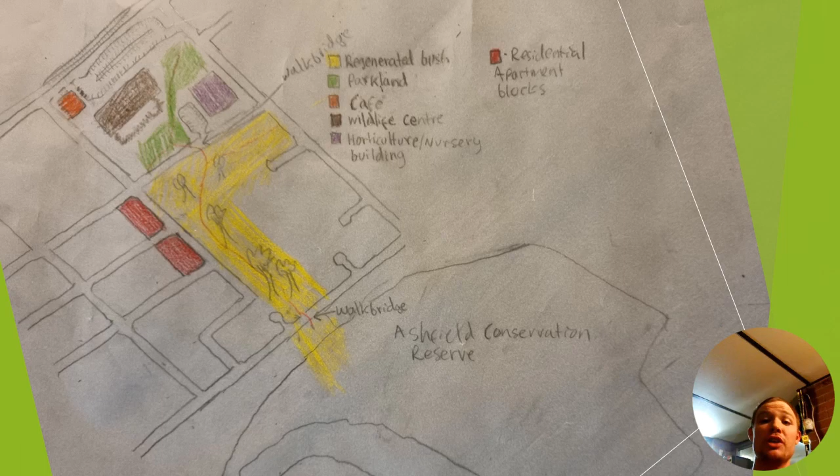Here is the project sketch for concept one.

So for concept two, there are many aspects individually that make up the grand plan. First of all, it'll be to create small grassy areas in key locations for people to relax and enjoy a sunny afternoon. But also, sporting facilities will be created, such as an athletics track and a kiddies pool, as well as an Olympic-sized swimming pool in that Ashfield Reserve section.

Also, a section of road will be cut off and created into a sort of commercial district that is walkable for pedestrians. Houses adjacent to that will be demolished or even just repurposed into cafes, restaurants, bars, and general shops as well. Further down towards the river, a cul-de-sac will be repurposed and the surrounding houses demolished and a green area constructed.

It'll all be repurposed into an amphitheatre for performing arts, for music, acting, and such. And it'll be a sort of amphitheatre-type dome with a roof and large sloping grass areas for people to sit down and enjoy.

So a handful of houses will also, on top of that, need to be demolished to create a few high-rise apartment blocks that, in and of themselves, will increase the density by quite a bit and more than make up for the dwelling numbers lost by clearing said houses.

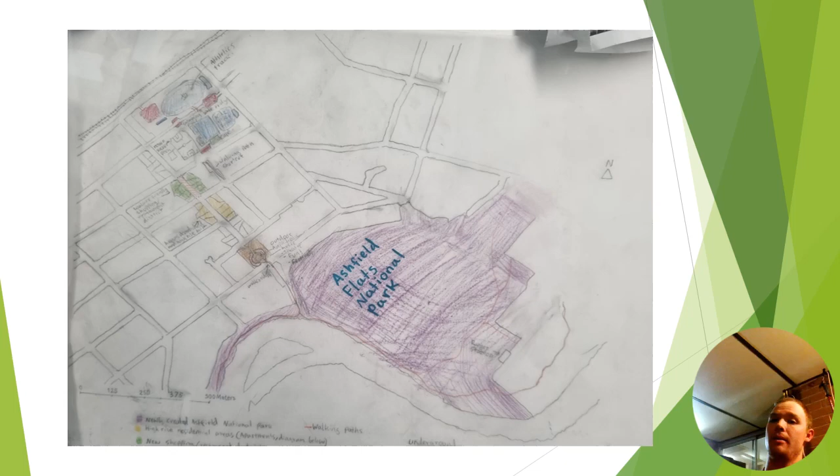So concept three is more orientated towards residences and increasing the population density of the suburb. In the northern part of the Ashfield Reserve, there'll be many apartments constructed and a cul-de-sac road coming in from the east to service those apartments.

Around the apartments, there'll be ample green areas with urban vegetation and paths intersecting down towards the other sections of the reserve. The soccer pitch will be left alone in this case. It'll be enhanced with a new clubhouse and stands being built for spectators.

So the reserve itself, the Ashfield Reserve, will be extended and funding will be allocated for environmental research there. Next to the soccer pitch, there'll be a small shopping centre constructed where people can shop, get their hair cut, buy electronics and other purposes.

And the pathways will intersect all crucial areas to be constructed from the northern edge of Ashfield Reserve to the soccer pitch and throughout the shopping mall.

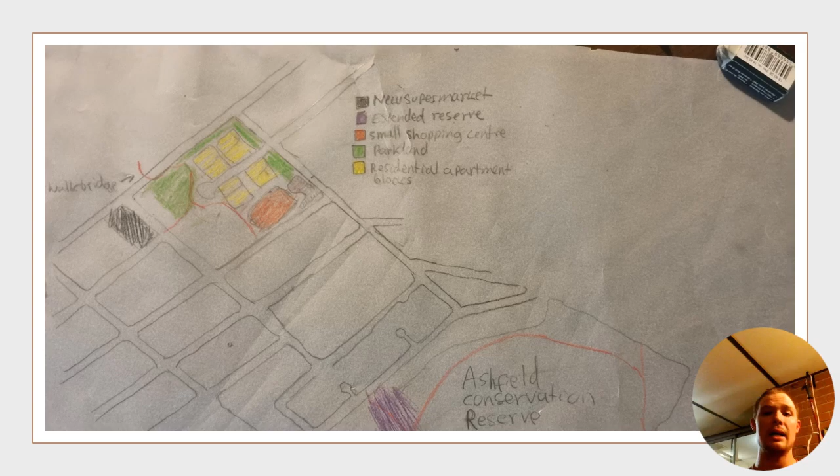Here lies the sketch for concept three.

So concept four entails building a brand new AFL stadium along with the clubhouse, stands, shops, a footy shop as well. It'll be used mainly for regional games, but it'll be able to host AFL games when needed.

Cricket games will also be able to be played there when needed, and festivals and concerts will also be very popular there as well.

So the apartments will need to be constructed to increase the density of the houses displaced, and they'll be constructed adjacent to the AFL pitch, and also the Ashfield Reserve will extend up towards the apartment blocks, demolishing any houses in the way, and create a green kind of urban forest for people living in the dense apartment blocks.

Plenty of walking paths will be constructed around with walking bridges over crucial roads so as to not create congestion and dangerous situations for walkers and drivers alike.

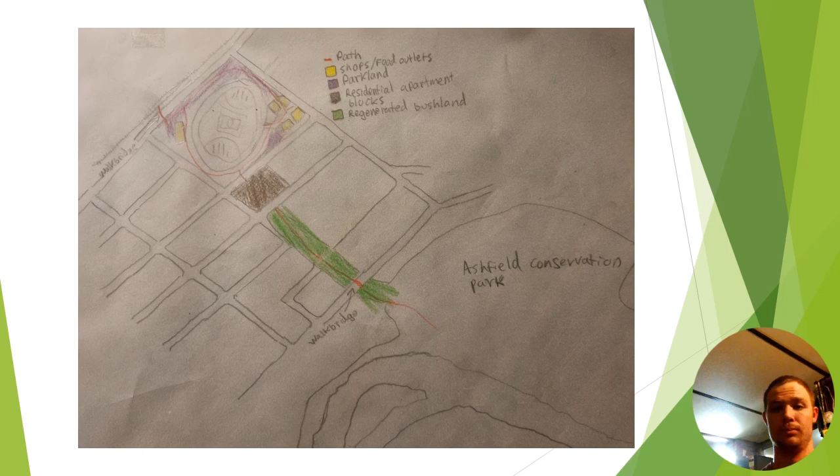For concept 5, an amusement park with water slides, roller coasters, bumper cars, etc. will be constructed where the Ashfield Reserve is, but it will also take up more space as some houses will need to be cleared and extend down towards the river.

Inside there'll be, like I said, plenty of rides, confectionery stores, restaurants, cafes. The reserve will be left alone. It'll be protected and the walking trails within it will be extended.

But also the wildlife centre will be constructed just on the border of the reserve. Here sick animals and conservation works will be organised and carried out in the reserve.

So information sessions will also be carried out at that wildlife centre I mentioned, and kids will be able to view certain animals in a show and tell kind of situation, as long as the health of said animals permit that.

Small grassy areas will be located both outside and inside the amusement park, for people to have lunch, if they want to bring their own food and have sandwiches in the grassy area between rides, they can.

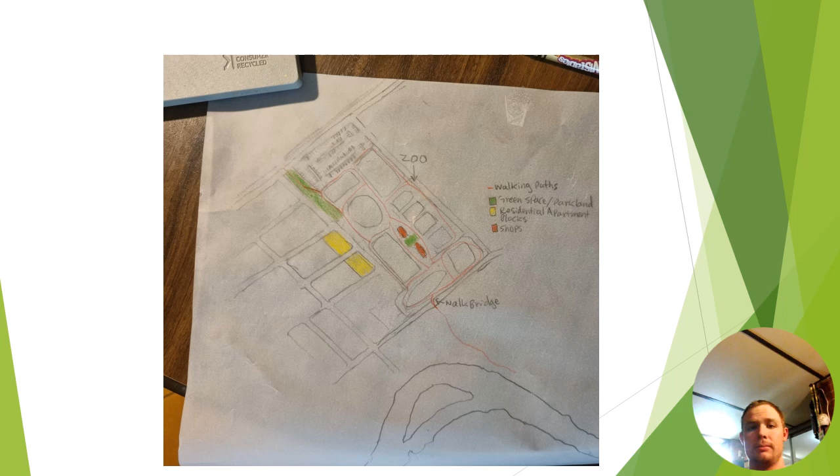So our Aim 1 was to provide urban greenery and natural areas to offer relaxation and recreational options. The objectives for this aim were to build grassy recreational areas for people to enjoy, extend or enhance the Ashfield Reserve, and plant urban vegetation.

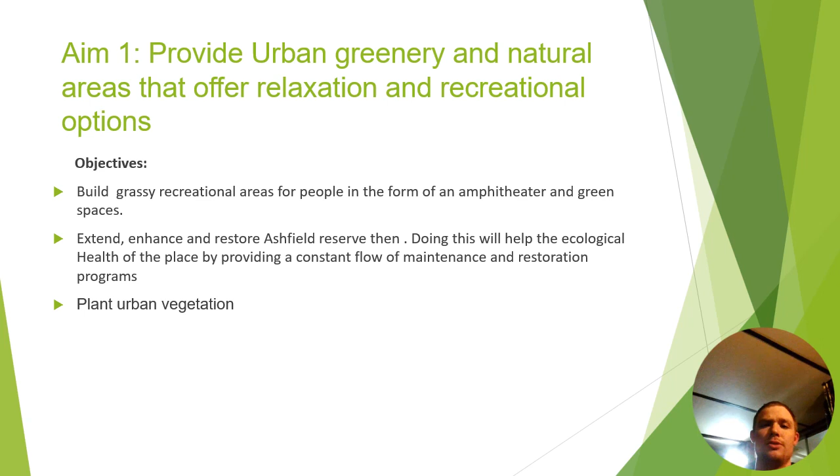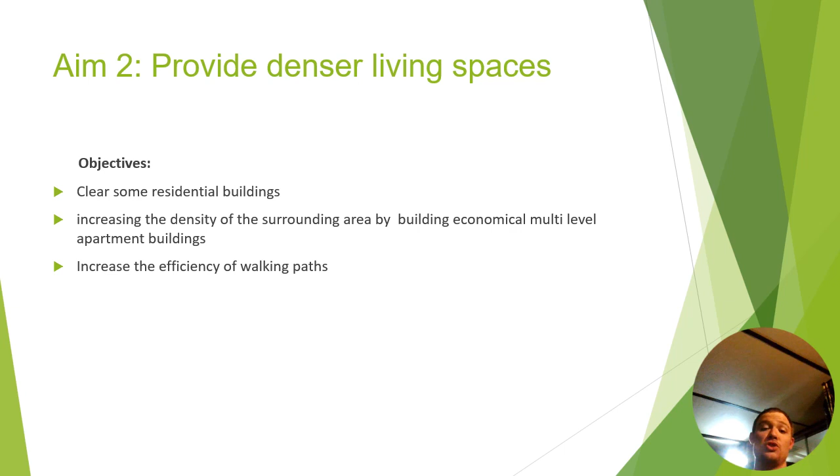Aim 2 was to provide denser living spaces. The objectives for this aim were to clear some residential buildings, increase the density of the surrounding area by building apartment blocks, and also to increase the efficiency of walking paths.

Aim 3 was to offer facilities for people to exercise and improve their physical and mental well-being. The objectives for this aim were to build educational spaces for people to enjoy, construct sporting facilities, and make facilities to provide fun and enjoyment for the whole family.

Aim 4 was to create a vibrant community with plenty of commercial and dining opportunities in order to generate a pleasant atmosphere to the place. The objectives for this aim were to clear or modify residential buildings in order to make shops or restaurants, and improve the aesthetics of this landscape.

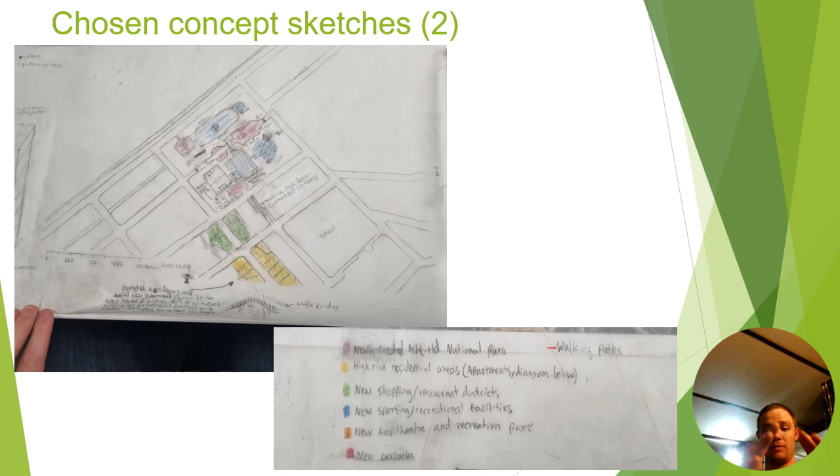So right here you have the sketches for Concept 2, my chosen concept. There's a zoomed in sketch of the Ashfield Reserve and the legend accompanying it. And here you have more sketches of Concept 2: the zoomed out sketch of the whole Ashfield suburb area, a zoomed in map of the amphitheatre, apartments and shopping district, and the legend accompanying it all.

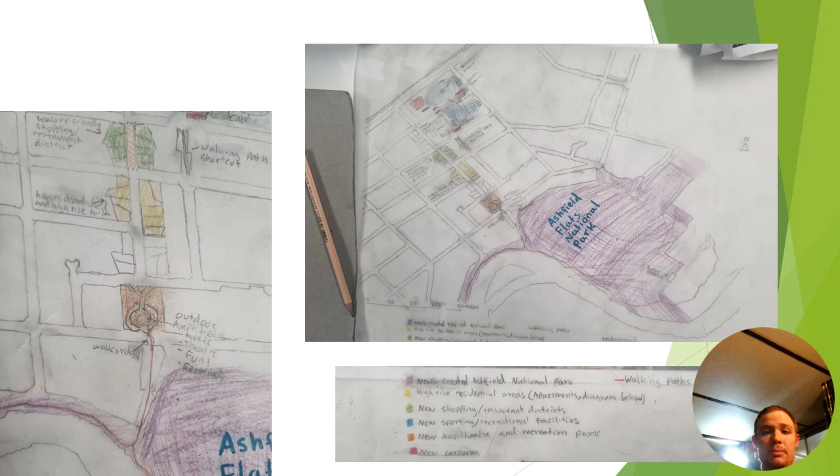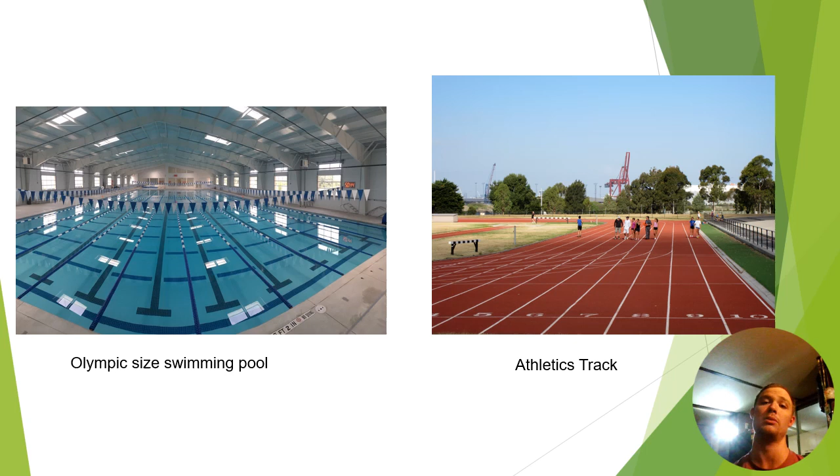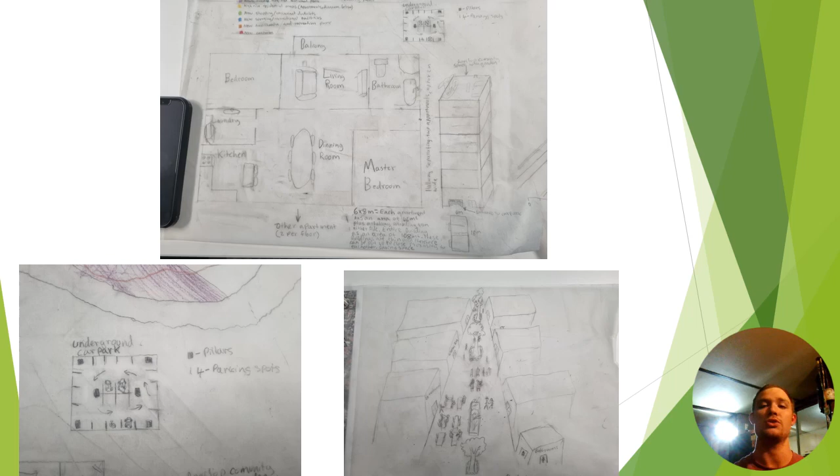First, the sporting facilities will be constructed with the parking spaces around them as well, as they do not need the closed streets for an extended period of time for this. While this is taking place, the national park will be officially created and the borders extended. Conservation work and regeneration work can be carried out at a later time after the main works are finished.

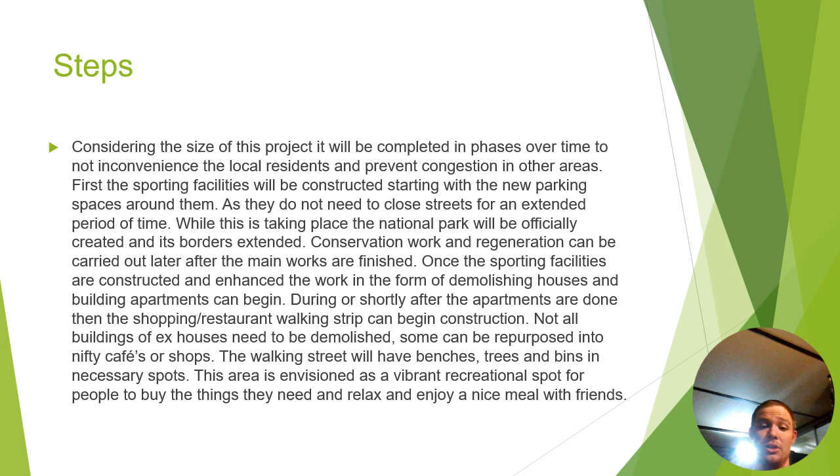Conclusion. Out of the 6 proposed ideas, I've selected Concept 2 as my design plan for the Ashfield Reserve. It has the best balance of aims and objectives out of all of them. This concept promoted and managed the environment well by extending the reserve and transforming it into a national park.

It also addressed the commercial side of things with the walkable shopping districts. It provided cheap apartment buildings and increased the population density. It also created many green spaces for people to enjoy, like the amphitheater, and it revamped the soccer pitch and created more sporting facilities for people to stay fit and healthy and be social with other people.

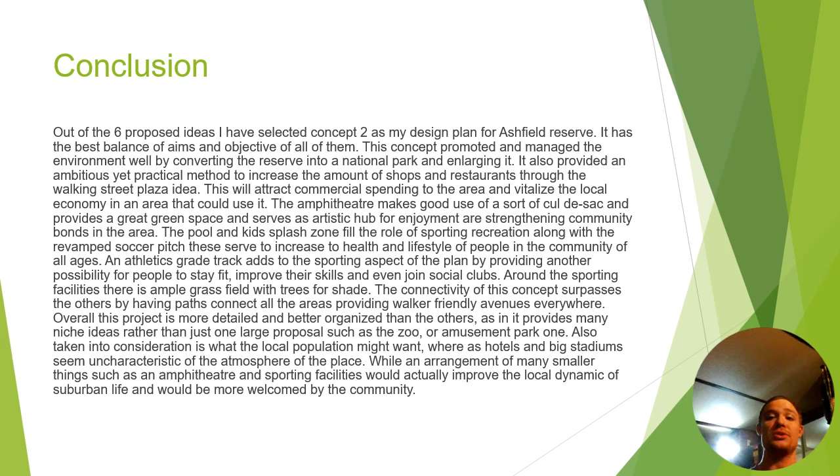This concept addresses all the issues individually, whereas some of the other concepts do it more as a kind of one-size-fits-all sort of concept, and I think that is the key to this concept's success. It will add to the local dynamic of the community, and it's more compatible with the suburban life that's already present in the Ashfield suburb.